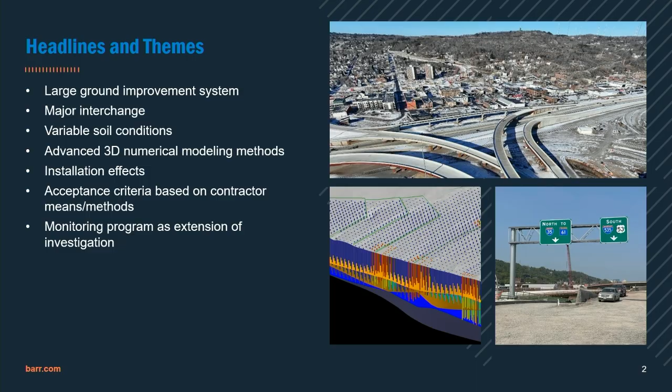Some headlines and themes we're going to talk about: poor soil conditions, the analysis and modeling that went into that analysis on which a design was based, then the construction of that design using construction methods that weren't quite as well understood going into construction, and then a robust monitoring program throughout all of it to confirm that it was performing as expected.

So I'll go through the standard outline. You're going to get some background. I'm going to talk about some soil conditions. I'll hit the analysis and the design, the construction, and the performance. And I'll tell you what these little things are in this picture.

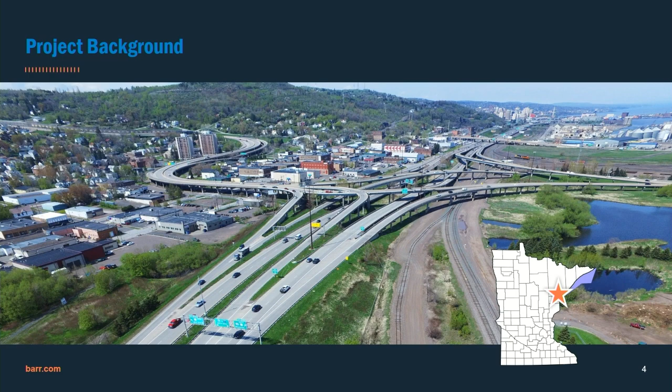So why? Well, everything you saw from that yellow sign to that overpass was on bridges. Some of those are low-profile bridges, like you see here, with a lot of pile bents supporting them with exposed pile. It's a costly maintenance and inspection effort by the DOT, and they wanted to get away from that.

Moreover, all the freight traffic that comes into the port, offloaded from ships and wanting to get onto trucks, can't use that interchange. The geometry is such that the really big components coming through the port have to make their way through city streets. So another ambition of this project was to redo the geometry of the interchange so it was more friendly to heavy industrial traffic.

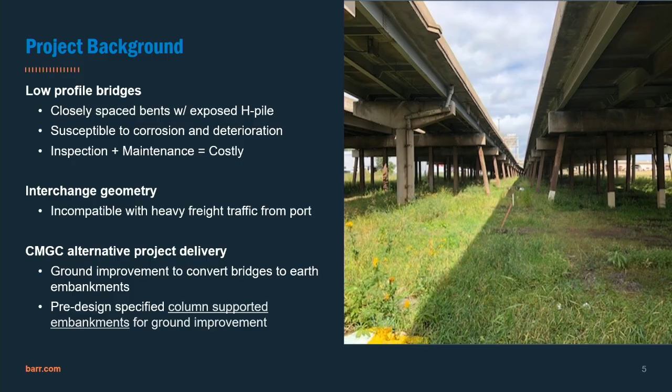Something I'll say here, but probably won't mention again, is this was an alternative project delivery. So this wasn't your standard design-bid-build project delivery; this is what's known as construction manager, general contractor. My colleague Mike Hagerty is going to talk more about this later—he's the person who swapped slots with me to accommodate some personal conflicts, so thank you, Mike. But this project was also, like his project, an alternative project delivery.

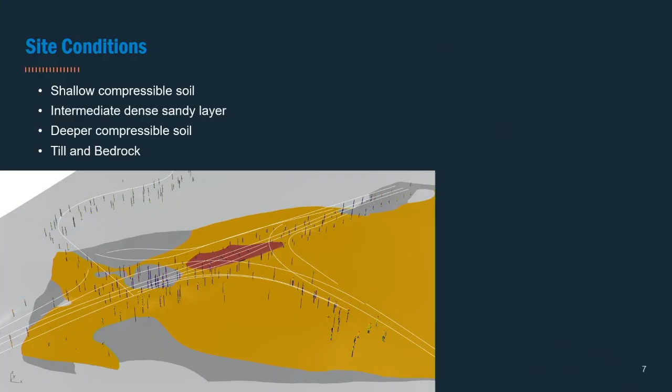All right, some site conditions. Generally speaking—and I use that term loosely, because soil conditions changed every time you stepped a foot across the site—generally speaking, we had a zone of upper soft clay: lacustrine sediments, soft alluvials, some organics, even some naughty industrial fill that might be in the ground.

And then we had a zone of lower clay, also alluvial and lacustrine, a little bit stronger, but not all that much. That's fine and good, but what really made this site problematic was the layer of dense sand in between them that could come and go. It was anywhere from 0 to 40 feet thick, and it was very dense.

If we look at something that's going to support high embankments, some retaining walls, some of those might be on piles or other column elements. It's going to be hard to get that stuff through dense sand, but sometimes if it's only 5 feet thick, we'll plow right through it and not even know it. That was a challenge on this project.

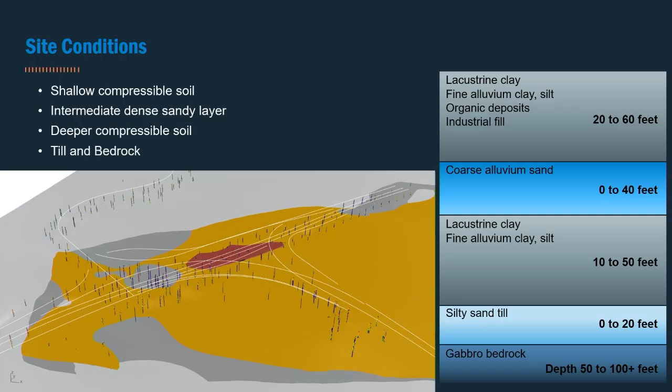I got some boring logs here because I couldn't help myself. You can't read that, but it's soft, weight of hammer, more compressible, more weight of hammer. This is a cone sounding, which really illustrates how that dense sand goes from really soft weight of hammer material, and then the tip resistance in the middle of that plot shoots way up - it's really, really dense sand. But underneath it is more compressible material.

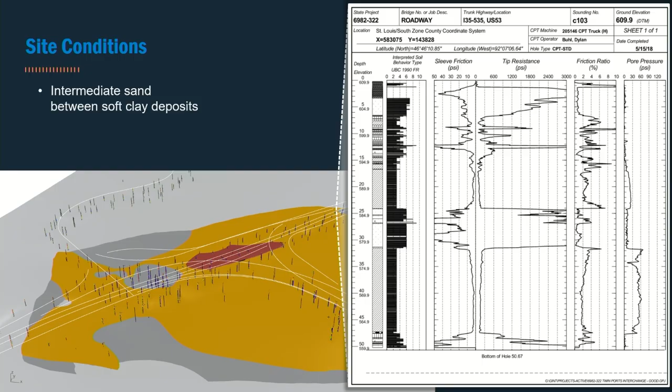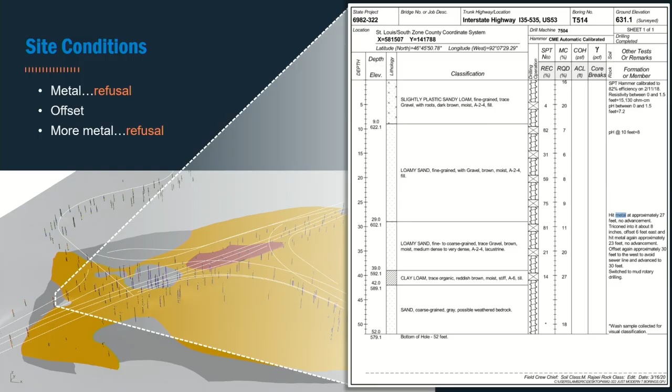We even found some metal debris in peat, of all things, in spots where we hit it. So, okay, that's bad. Moved over, drilled again, hit more metal debris at the same depth, moved over, hit it again. The running joke was there's a Volkswagen on this job somewhere - who's going to be the one to find it?

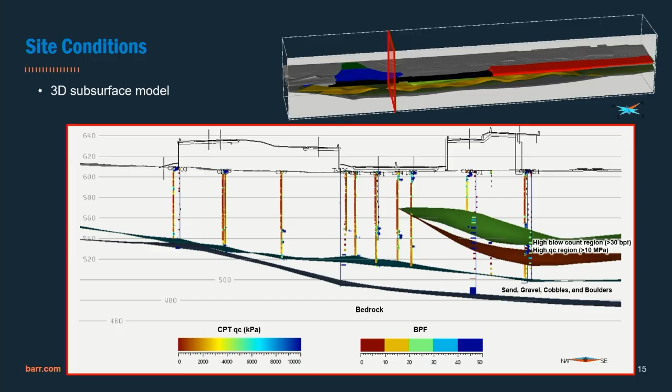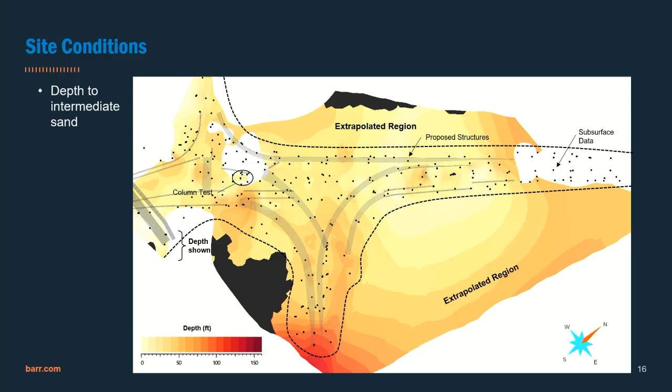In this cross-section, that green and brown blob to the right is our kind of floating dense sand layer. You can see it exists to some thickness on one side of the alignment, but on the left side, it's gone. From that, we can come up with some nice plots that show us depth to the top of the sand and contours of thickness, perhaps. So it was very useful to try to get a handle on what are the bad soil conditions here.

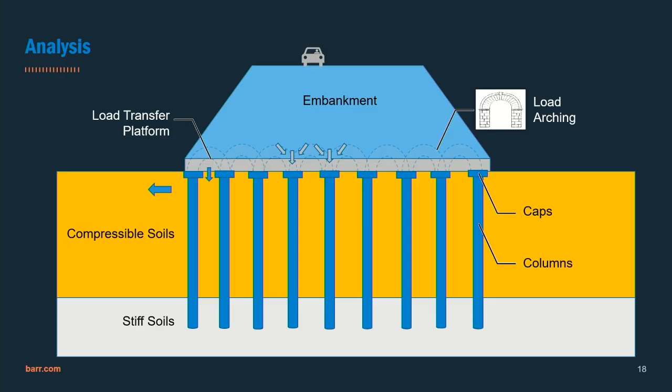So typically in these systems, what's built is an aggregate platform of well-graded, compacted aggregate interspersed with some geosynthetics to get it stiff, but it's not all that stiff - there is some give to it. The mechanisms we look at when we design these things are three mechanisms.

We're looking at settlement - that's the overall thing we're trying to treat and address. We don't want the roadway or other structures to settle, but you do get some settlement in between the columns. So you want to keep track of that and see what's the magnitude, how big a deal is that. Then we look at load transfer into the columns - is the load arching between columns the way we expect it to?

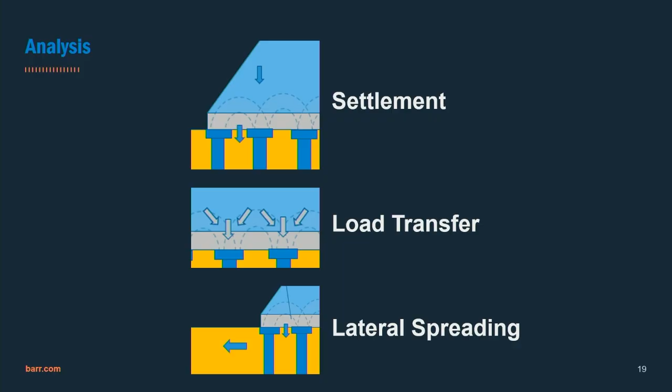Then sometimes, if the settlement in between columns is enough, and the soils are soft enough, and along the edges of these systems if the grade is steep enough - say you have a wall - you can get a phenomenon we call lateral spreading, where even that little bit of settlement in between columns is enough to shove the soil out of the way. To the outside of the system, there's nothing there to confine it, so it has a tendency to flow out and spread off to the side. When we're building rigid structures like concrete retaining walls, or maybe we have some drainage infrastructure there, a little bit of movement could be a big deal.

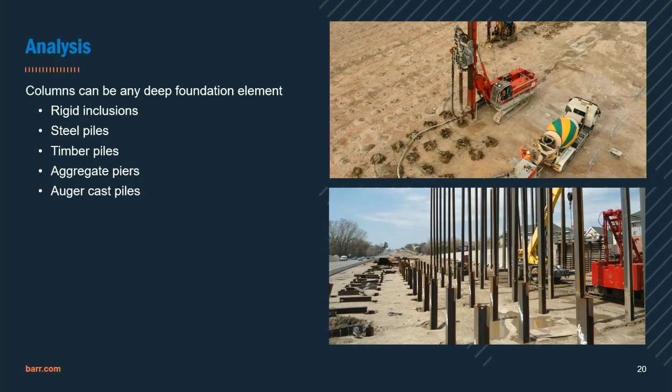Some slides on the columns themselves. What do the columns mean? Well, they can be a lot of different things. In this case, rigid inclusions is the industry term for unreinforced concrete shafts that can be installed really quickly in soft soils, and we used a lot of those on this project. You could also use steel piles, and we did in fact use some H piles in some select areas. But you could use timber piles, aggregate columns, whatever deep foundation element you think suits your job, you can do that.

The load transfer platform is a thickness of compacted aggregate with some geosynthetics layered in to help get it stiff. That's typical. You could do concrete, and in fact we did have a small part of this job where we had to use a concrete load transfer platform, but it's very commonly compacted aggregate.

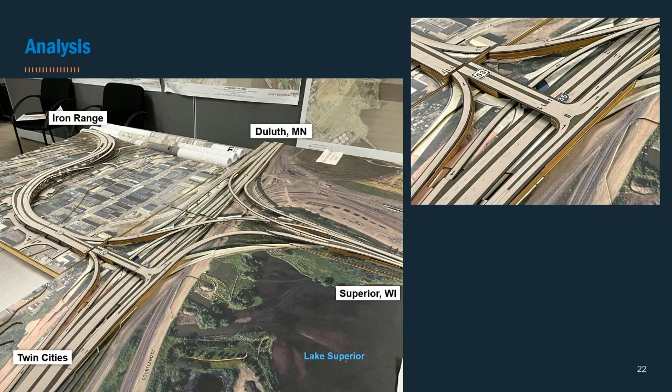Okay, this is a mock-up of the new interchange. It kind of looks like the old one just because there's a lot of wavy roads going everywhere. But now the distinction is, instead of everything supported on pile bents and typical structural foundations, these are supported on embankments, faced by retaining walls. We've got MSE walls, concrete walls on piles, and concrete walls on spread footings. And so when that happens, you've got rigid elements interacting with soft elements.

In the engineering analysis, when you have high modulus rigid walls and piles interacting with low modulus soft soils, our conventional analog ways of evaluating that can be complicated, tedious, and overly conservative, sometimes really conservative. So it's really been in the last several years where numerical modeling software has allowed engineers to look at the discrete interactions. In a finite difference model or finite element model, we can look at all the different deformational and elastic interactions between all the materials, iterate that, and come up with a result that shows just what the displacements are. To do that analog with just equations is very challenging, if not impossible. So that's why we use what we'll show you next: a three-dimensional numerical analysis software.

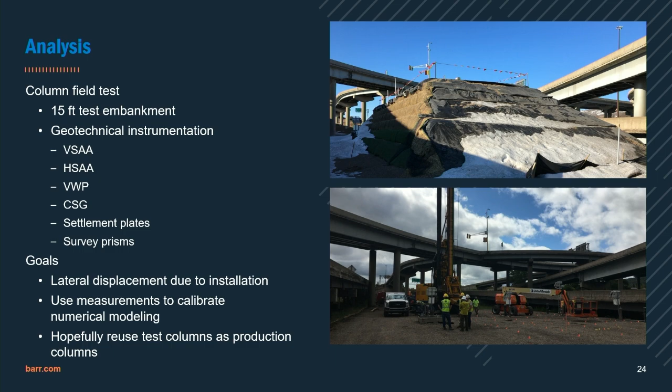And then C, get more of a firsthand look at how, as these columns go in, they affect nearby infrastructure. Like in this lower photo, there are bridges to the side carrying traffic. Are those at risk in any way?

And I want to point out that my colleague at the DOT, Rich Lamb, wrote a paper on this and presented it at a conference a few years ago. So he's got all sorts of plots and results on that.

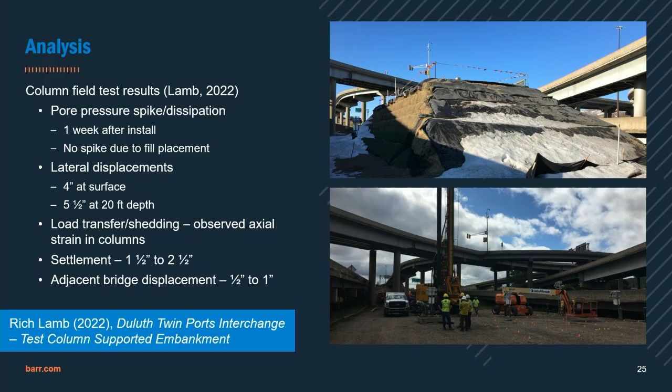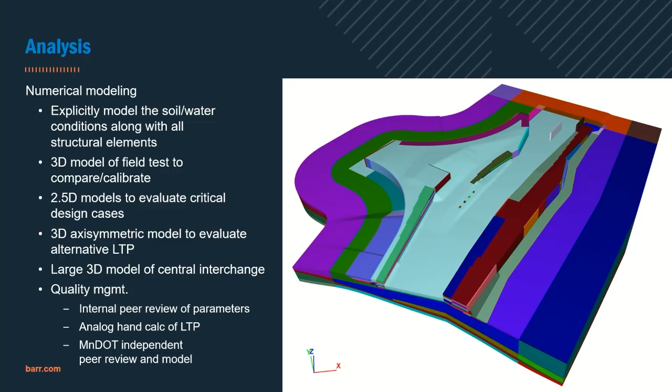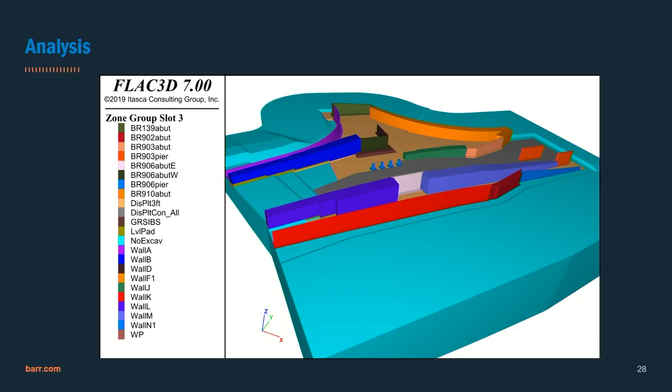I'm not going to go through all those bullet points, but suffice to say, we built a large 3D numerical model at the center of the interchange that encompassed all of the different bridge abutments, retaining walls, reinforced zones for MSE walls, and the different material sections for the load transfer platform, working platforms, and general roadway fill. That's all incorporated into this model. It takes a long time to get the geometry created and set, but once you do, you can start iterating on different parameters, tweak some of the interactions between different elements, and do a nice sensitivity analysis to see what are the critical areas of the project.

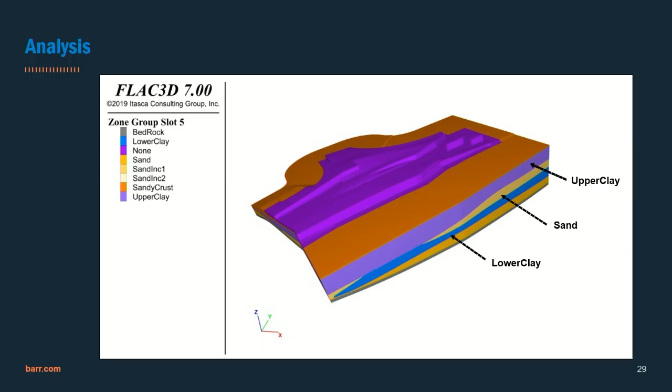And then also what's nice is we take that large 3D soil model we created from all of our soil investigation, and that gets directly imported into here and is spatially correct from one end of the model to the other.

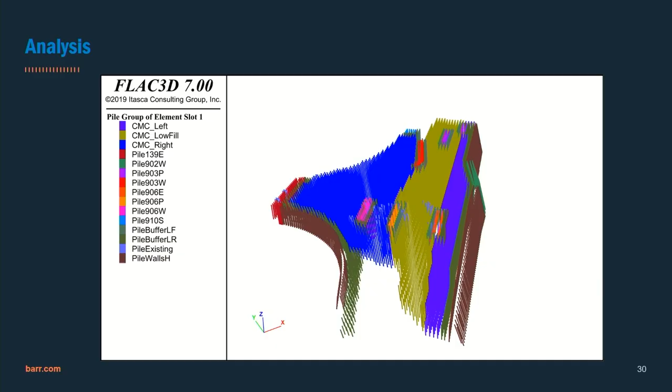And then all of our columns go in there as discrete elements, so we don't make any generalization on any sets of columns or anything. We can isolate on any given column and see: is it performing the way it's supposed to? Is it in failure? Is it bending? The model allows us to do that.

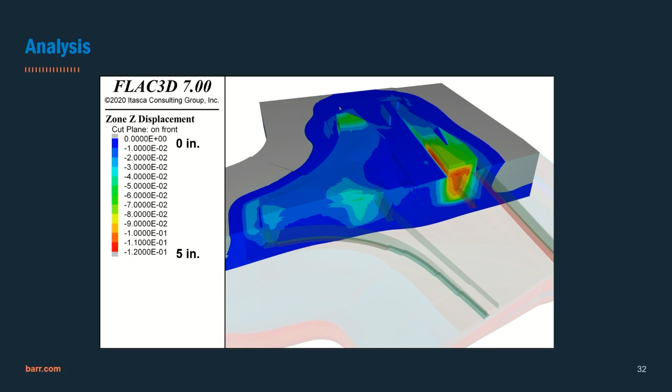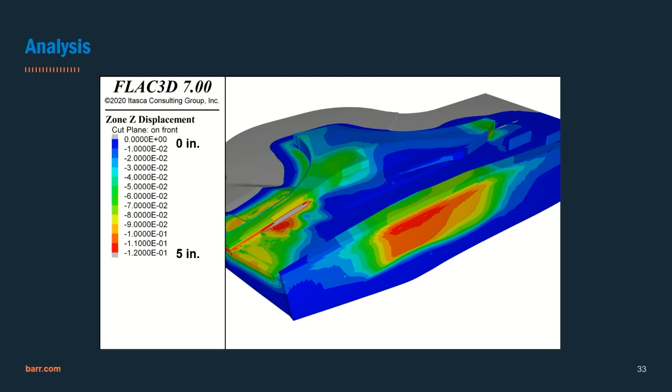If we look at a cross-section 90 degrees to that, we see that big red zone again. But again, the tops of the embankments shown as green are showing settlement at acceptable levels. That red blob to the left side, that's a boundary effect. Yeah, that looks bad, doesn't it, Brent? But it represents an area where we have untreated ground. We couldn't quite scrub that from the model, but that was not an area that needed ground improvement treatment.

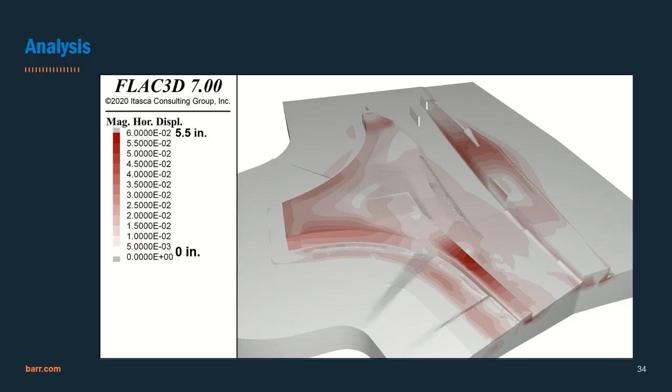Lateral deformations: we can look at the effect of lateral spreading. How much do the soil, the walls, especially at the toes of walls, spread outward and kick outward? We can analyze that, and this is showing that we saw lateral deformations of not quite 6 inches, more in the 5 to 5.5 inch range, as predicted by the model. In reality, we saw much less than that. But it was still enough that in order to properly mitigate it, we put in a system of large diameter steel rebars in the embankment. That was another feature of the ground improvement system.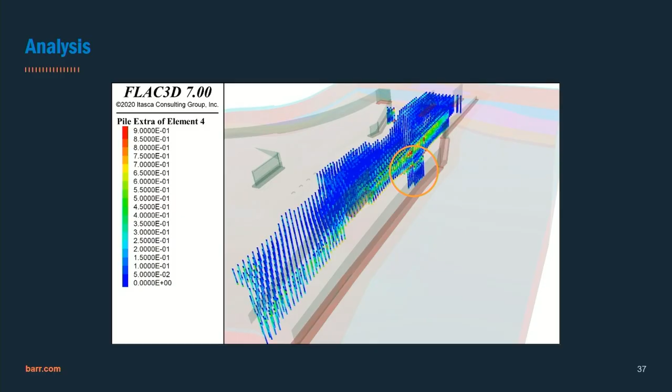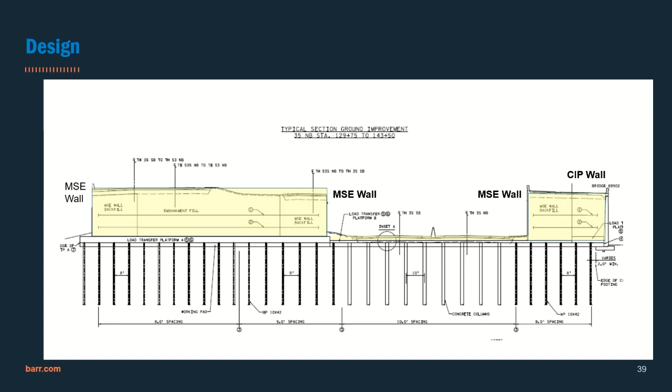All right, so what does that look like as a design? This is a typical section. We've got high fills on the left and right, and then a low fill area in the middle, which would settle if not treated, but it's lower. We've got columns from one side to the other at different spacings, from 8 to 10 feet apart. Load transfer platforms are 3 feet thick beneath the higher fills, only 2 feet thick beneath the lower fills. And then our layers of steel rebar in the embankment. This particular section had number 10 and number 14 rebar.

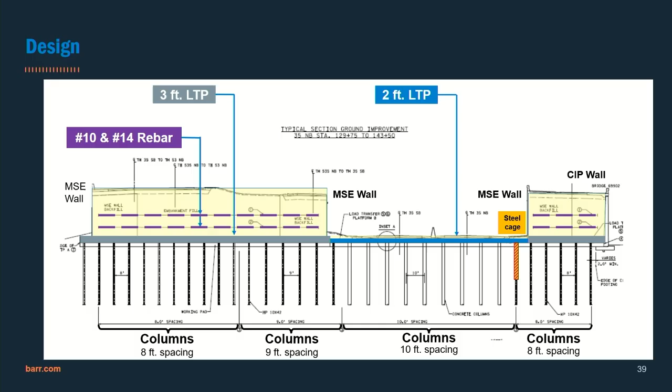And one critical case we found through the analysis was in parts where columns were out in front of walls retaining high fills, those were at critical risk of failure and bending. So we had to put steel rebar cages in those columns to mitigate against bending failure.

So there's a picture of the columns and a group of them that were exhumed. Concrete strength of the columns was specified as 5,000 PSI. Their minimum diameter is 16 inches, and they're installed as what's called full displacement columns. I've got a slide that will better illustrate what exactly that means.

For the high fill areas, termination criteria were to take those columns down to a hard bearing stratum, wherever the soil model says a hard bearing stratum was. For the low fill area, those columns were only up to 60 feet in length, and those were supporting the low fills in just frictional side resistance within the soft material.

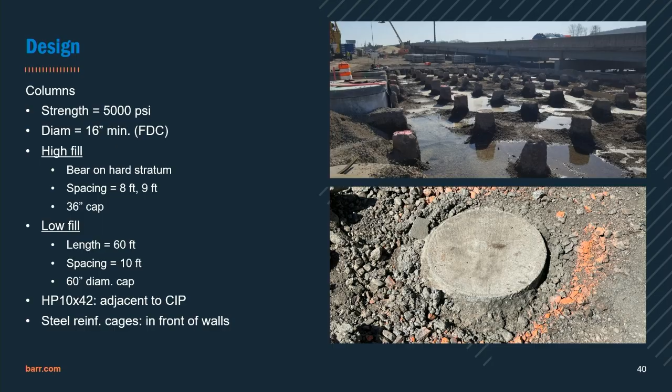At the tops of the columns, as a way to optimize spacing, we had caps. Each column had a cap. For the high fill areas, we had 3-foot diameter caps. For the low fill area, it may sound counterintuitive, but we needed bigger caps because of the thin height of the load transfer platform. The math works out that if you want columns farther apart, you need to mitigate that by having your edge-to-edge cap distance fit and match within just a 2-foot thick layer of LTP.

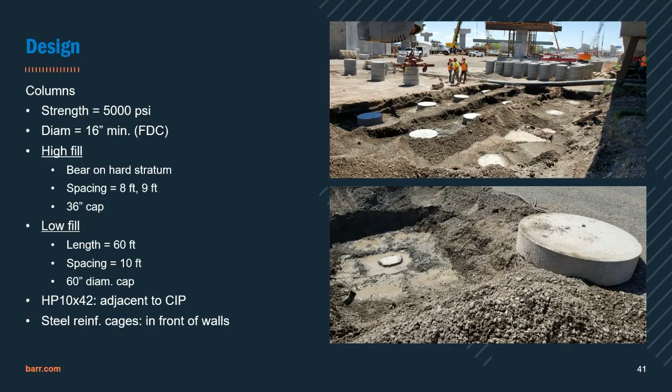For the load transfer platform, on top is the conventional compacted aggregate load transfer platform with geogrid. On the lower left, there is the special concrete load transfer platform that we poured, which was to span a new 72-inch storm sewer being placed inside a 96-inch casing. It was just too far of a span for the conventional load transfer platform to distribute the stresses, so we put in a 2-foot thick fiber reinforced concrete platform.

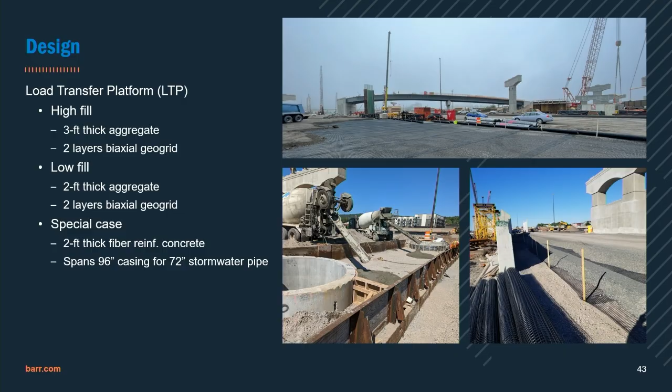This is a picture of the steel rebar. On the top picture, it's intermixed with the steel reinforcement of the MSE walls. But those serve to help passively - as the embankment may have this tendency to spread out due to that lateral spreading phenomenon, it will engage those plates, and it's that passive engagement that prevents the embankment from spreading more.

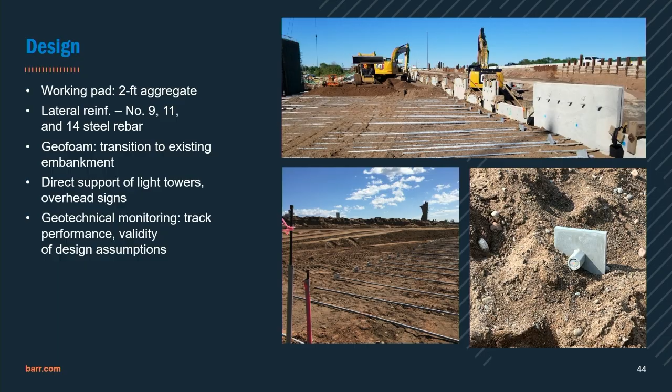We also had one area, harder to see, where the limits of our improvement came up against an existing embankment, and in order to mitigate settlements we thought would happen, we would have had to excavate a substantial part of that embankment. So instead, we had a lightweight fill area to mitigate those settlements - some areas where geofoam was used as a transition from our column-supported part to a non-treated part.

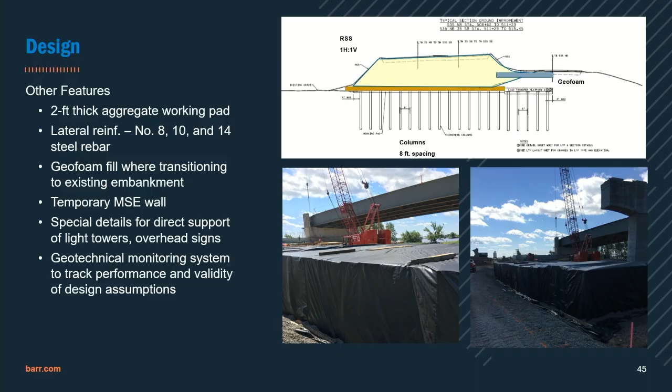This is a picture of a temporary wrap face wall that had to be explicitly addressed, making sure we had columns supporting that during the first year of construction. It was just another one of those specific challenges that can happen on any project, to make sure we addressed support of this wall during construction.

Overhead signs and some of the tall light towers were also located throughout the footprint of this ground improvement. Sometimes those were supported just as spread footings within the fill over top of our improvement system. Other times the foundations were low enough that we could directly and structurally connect the columns right into those footings.

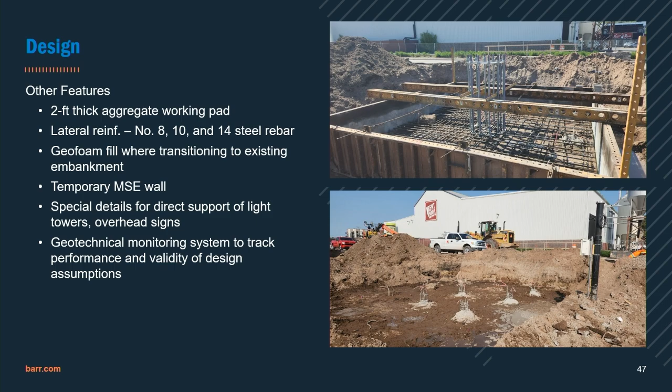So the columns themselves - those were rigid inclusions is the conventional industry term now. On this project, we just call them columns.

That is showing a rig that augers down using that tool. What happens is the flights on the edge of that tool dig into the ground, but the tooling diameter bulges out partway up from that, and that serves to push the soil to the side. So it's displacing the soil to the side, keeping it in the ground. This was selected because it was low spoil risk at the top - we didn't want spoil from the ground coming up to the surface for environmental reasons.

Once it goes down there and pushes the soil to the side, there are ports at the end of the tooling which open up, and as the tooling is withdrawn, the whole column is tremie grouted from the bottom up. The whole thing can take 5-6 minutes. It's very fast. Some of the longer columns may be closer to 10 minutes, because we did have some 100-foot columns, but it goes very fast. You can do over 100 columns in a day.

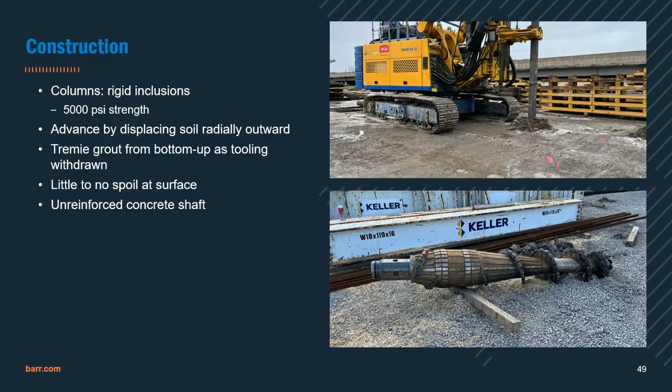We did load tests on those columns just to confirm the suitability of the bearing layer that they were bearing on, but then also as a way to check that the contractor's means and methods were consistent, that they supported the analysis that went into putting that column on that bearing layer.

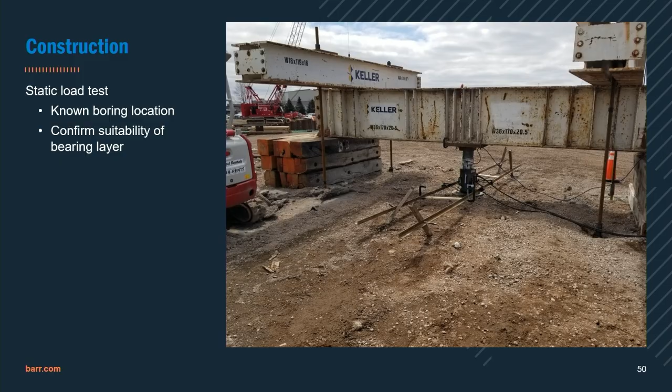But the load tests themselves are not a great way to establish termination criteria, and that was a big challenge on this project. Contrast with pile driving, you can just count blows and get a sense of how well that pile is engaging the soil at depth. Hey, are we getting the capacity we want?

With columns, as of the time this was designed, there was no standardized way to specify what the termination criteria was. Different contractors have different ways they collect data as they put a column in the ground. Some common things they track are torque, crowd pressure, grout volume, the rate of advance and withdrawal. But depending on the equipment, those can have different degrees of meaning.

Some contractors will put a lot of stock in torque. When they see a spike in torque, hey, we know we're in something good. Other contractors, not so much. So that was a challenge on this project.

The initial spec for the project gave a torque rate. It's kind of made up, but we needed something to give contractors to bid on. But then we explicitly said, hey, we know you're not going to like that rate, so we're going to do a series of demonstration columns at the beginning, and we will collectively come to an agreement on what constitutes termination criteria. And in this case, for this contractor, they had a

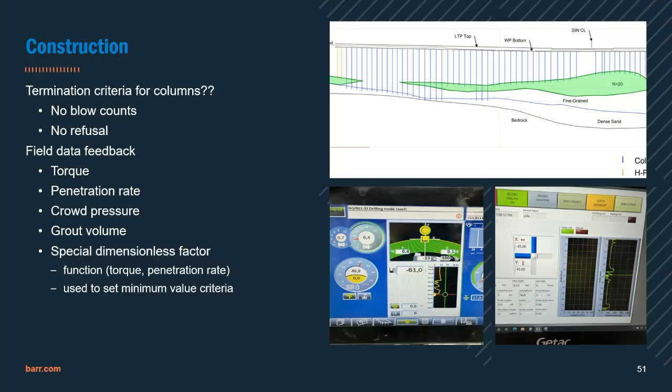dimensionless factor that their system spit out that we then calibrated to the needs of our design, and it worked out very well. There was a lot of angst in the beginning, but once we got that established, it was invaluable to set the termination criteria and then review logs for what amounted to thousands and thousands of columns.

Thousands and thousands of columns. So we had 6,375 of those rigid inclusion concrete columns. On top of that, we had over 1,700 H-piles. The reasons we had H-piles, I don't have time to go into. In hindsight, we probably didn't need to use them, but it was a bit of a compromise with the DOT's bridge office. But those are counted as part of the system. So all told, we had over 8,100 of these elements going in the ground, encompassing a plan area of 13.8 acres.

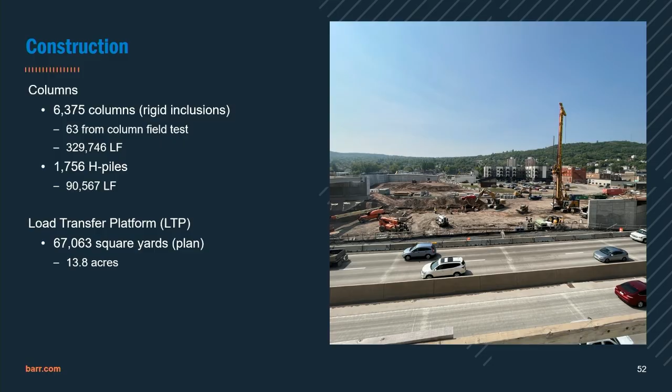Okay, that's great. Did it work? Let's find out.

So again, the things we look at when we design these systems are settlement, load transfer, and lateral spreading. Those are the engineering things. But installation effects was this construction-based phenomena that we had to be sure we kept track of. Was that going to be a big deal or not? Spoiler, it kind of was.

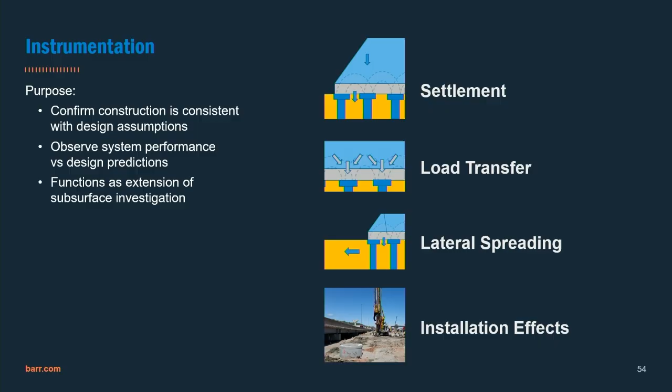For instrumentation, to track settlement and lateral spreading, we used what we call shape arrays. I'm going to get yelled at for this by other geotechs, but they're kind of glorified inclinometers. They're automated and can collect data up and down the length of the hose. We put those in horizontally as a way to measure settlement, underneath our load transfer platform. We put those in vertically to measure lateral deformations.

In the columns themselves, we had strain gauges on steel cages as a way to measure the take-up of axial strain and stress in columns, to make sure the columns are accepting the load. We also had strain gauges on the lateral rebar in the embankment, and that was a way to look at lateral spreading—are we getting take-up in those bars of axial strain, showing they're resisting some tendency of the embankment to move to the sides?

Qualitatively, we also put in vibrating wire piezometers. They're great for everything, we put in a lot of them. In this case, it helped us look at pore pressure increases in the soil, which might be an indication that the soil is going to consolidate, but it also shows how much those pressures spike due to installation when we put the columns in the ground.

We also put earth pressure cells at different levels of the load transfer platform. I don't put much stock in the quantitative readings of earth pressure cells, but they're great for looking at relative increases or decreases in earth pressure. So that was a qualitative redundant check on load transfer.

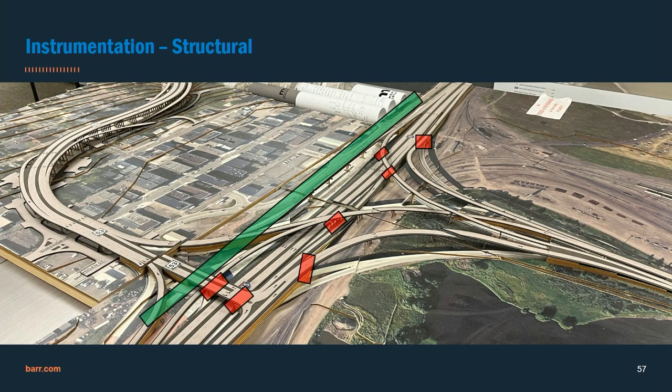The red squares and polygons represent bridge foundations on piles that were installed prior to the ground improvement going in. That green rectangle represents live traffic on an adjacent bridge, old bridge. So this is all in close quarters. These columns are going in just feet away from these features.

So we had tilt meters in those locations to look at vertical rotation. We had an automated total station with prisms that shot at intervals around the clock to look at different ways the structures might behave in three-dimensional space. They moving away, closer, left, right.

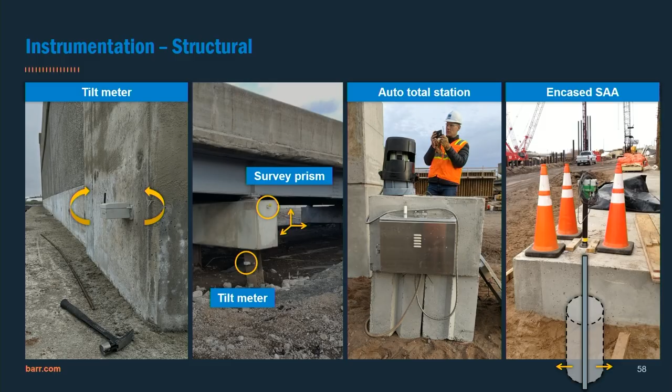And then on the far right, we did something that I think at the time was kind of novel. Maybe it's been done before. We put one of our shape arrays, again that's this glorified inclinometer, inside the pipe pile that supports one of the bridge abutments. The thought there is if the piles supporting those bridge abutments are going to feel that soil deformation against them and they're going to want to deform, hopefully we see that in this pile, and we'll see just how much deformation does occur.

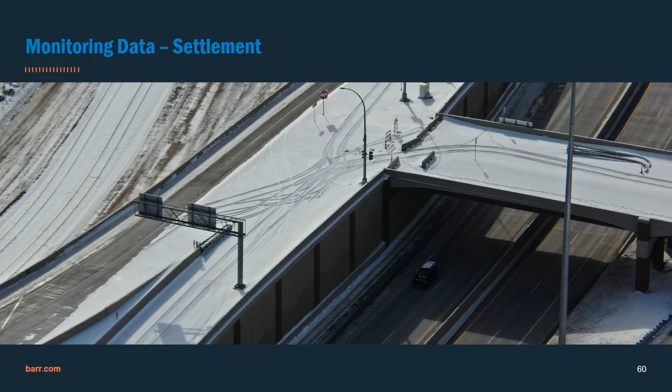All right, for settlement, I'm going to zoom in on this wall. It looks like a lot of the other walls, but this is actually the highest fill on the site. This is the same spot of the 5 inches of settlement slide I showed you earlier. This is just a picture of our shape array going in the ground.

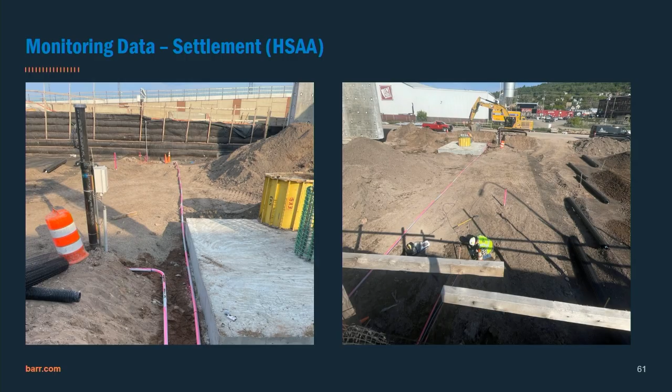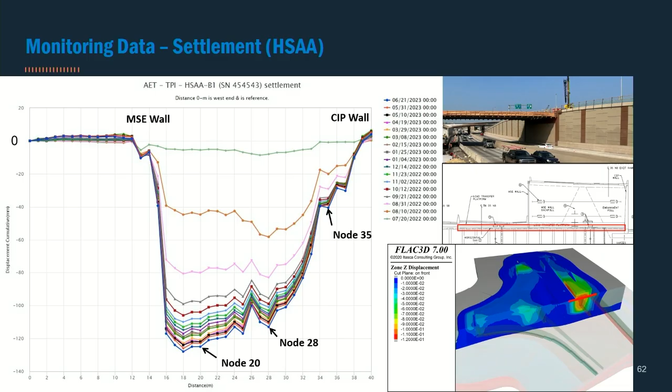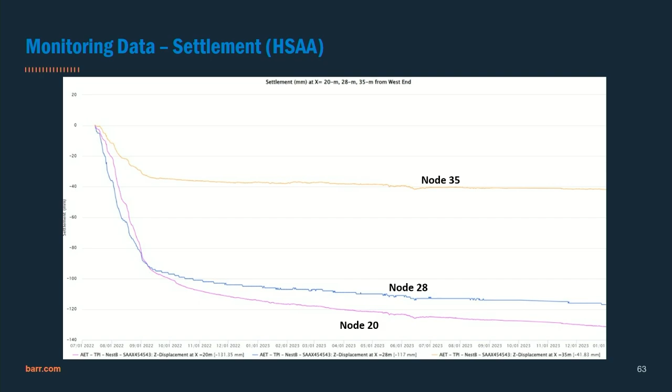The 3 nodes, the next slide is going to show the displacement versus time at each of those 3 nodes. So you can see we get most of our initial settlement right away at the beginning on the left during fill placement, and then as time goes on to the right, that displacement levels off. We enter more the creep domain of the soil settlement behavior, and that levels off. We have more data even beyond this slide, and it levels off even more.

The settlement plates, man, we tried. I really wanted to have ways to show how the settlement below and above the LTP was different. But we had challenges with getting baseline readings, and getting readings when rod extensions were added, so regrettably, I don't have great data on the settlement curves.

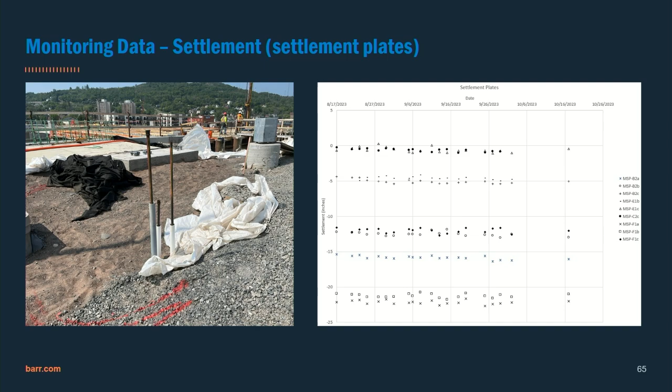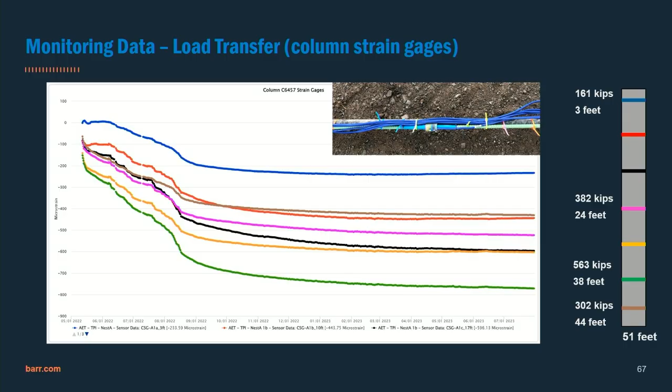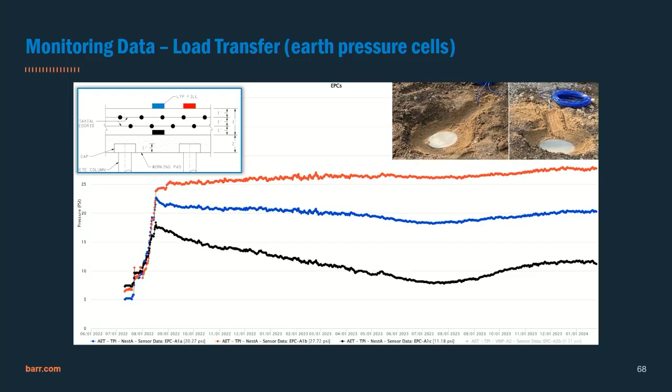Well then why, Brent, is it increasing at the far right? Well, these are not systems where they accept the load and then it doesn't change. It will change. As one column accepts load over here, it might lessen over here, but then it has side effects to the other ones. There's thousands of columns, and there'll be some feeling out of it as everything settles into place. So it's not unexpected that we see some variability on that, even after it had decreased.

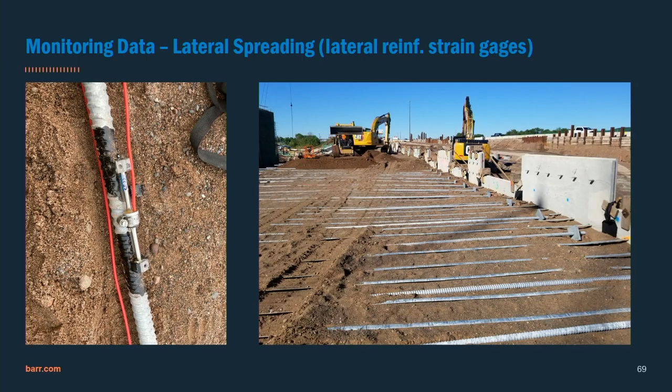For those lateral bars, there was some feedback from the team asking, do we really need those, Brent? This is showing that yeah, those did take up a heck of a lot of strain to help prevent the embankment from spreading outwards. Would it have spread outwards a lot? Well, who knows, but it would have looked bad. The walls might crack, MSE panels would be out of place, maybe some storm sewers get jostled around and don't work as well. So this was necessary.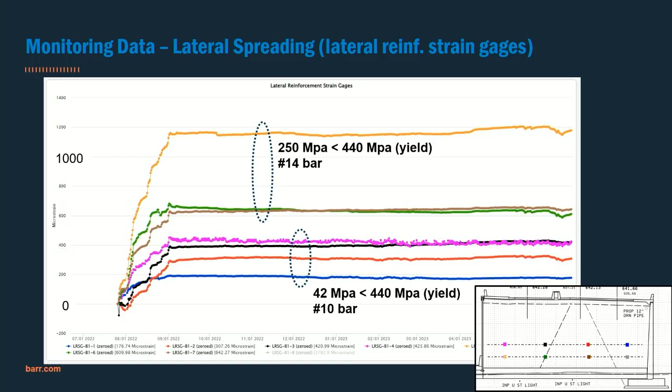The opposite happened. Why? Well, that's because the contractor decided to build up the MSE side of everything first and not backfill behind the retaining wall. It's fine, it worked, but that's not how I would have expected it to go.

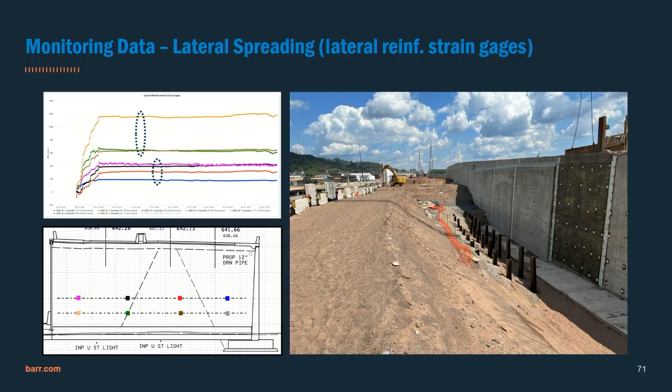Installation effects.

Just to reemphasize, that bridge on the left is carrying live traffic during the first year of construction, and we've got columns going in within 10 feet of that, with hundreds of those things along this stretch. During the test embankment, we saw the ground shift 4 inches just by putting in a small group of columns. Now we're putting in 10 times that.

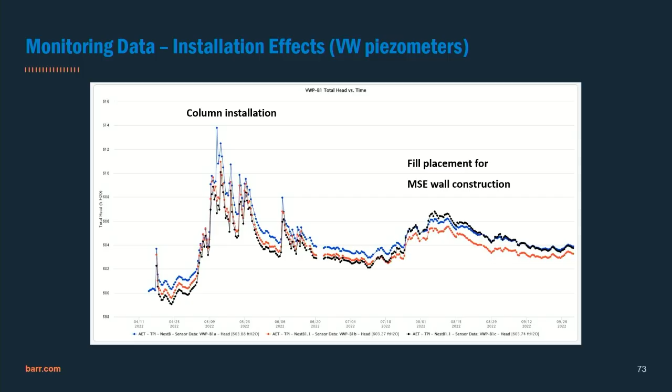So the piezometer there is showing the increase in pore pressure as felt by a piezometer. We do see a sharp spike in pore pressure over 10 feet of head just due to putting columns into the ground. Then after the columns were in, we see another slight bump just from fill placement.

But what really excited us was the encased SAA that we put in the piles supporting the bridge footing. On the right, you see a corner of a bridge footing. In between those cones is the stick-up of one of our sensors coming up out of the pile.

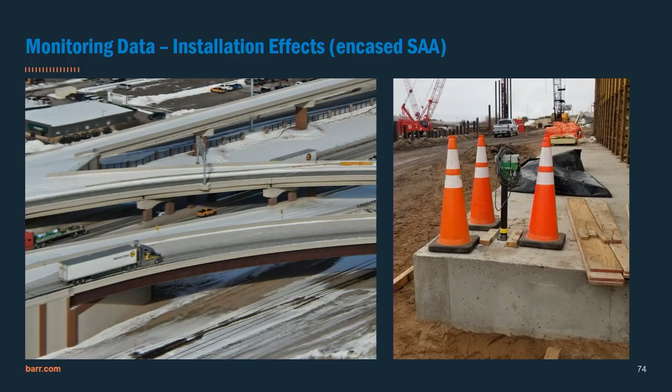This bridge abutment was the highest abutment on the job, and it was one that's going to receive those sweeping curved beams for some of the large passes. An inch out of tolerance at the top of that abutment was a big deal to some of the bridge designers.

I don't know the whole story, but I was told there were things that had to be done to make sure the top of the abutment was corrected in order to receive the beams. In the end, they were able to do it, but it wasn't like, oh, no big deal - there were adjustments that needed to be made. When I give this talk and illustrate this slide, it's the bridge structural engineers that get really wide eyes, like whoa, never would have thought that happened.

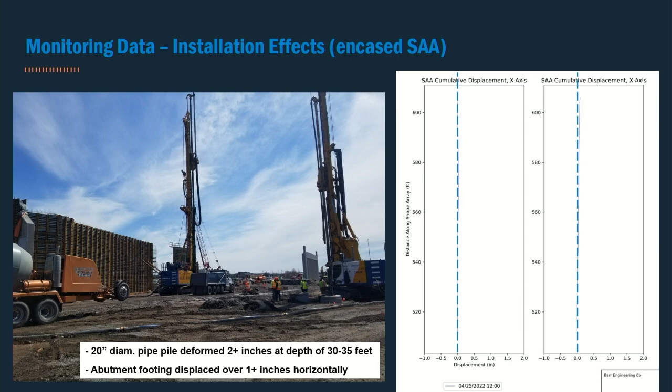Okay, I got some more comments. How am I doing on time? Good? All right.

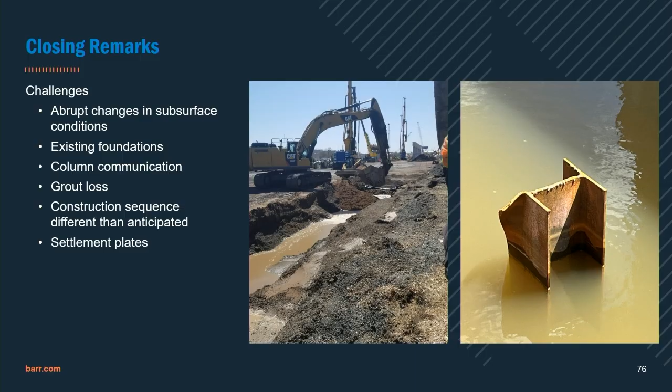Just some of the weird quirks that came up during the job. I touched on this already, but abrupt changes in subsurface conditions - we have our 3D soil model, and it's great and all, but on the job we could have a column go down 40 feet, struggle to get another foot into whatever material it's in, presumably dense sand. Okay, that's great. Then we go 8 feet over to the next column, and it goes down 90 feet. That happened often. So there were times we had to go back to the model, rerun an analysis assuming different column lengths just to make sure the design was still adequate for those changing conditions.

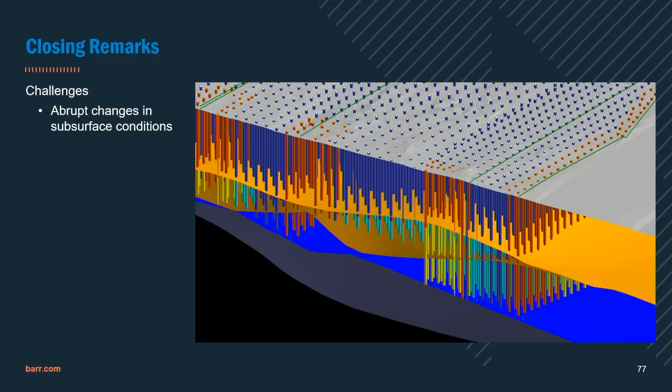Existing foundations were another challenge. That previous interchange had pile bents everywhere - those piles got cut off in the ground. Some of the substructures were actual column foundations with a footing and a pile cap. Sometimes those pile caps were removed, other times they were not. I was told, Brent, for the ones that are not removed, you're just going to have to deal with it and put your ground improvement around it.

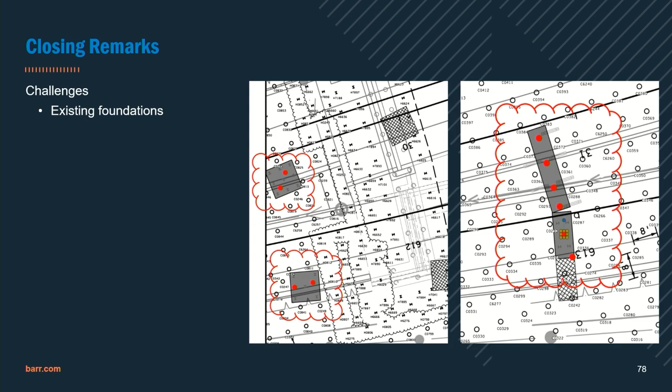And that's great, but then later I was told, no, those actually did come out. So keeping track of that during construction meant making sure we were putting extra columns in the ground if needed. There was also a little bit of anxiety around relying on a foundation pile cap that's been there 60-some years as an integral part of our system. It turned out to work, but at the beginning there was some trust that needed to be built there.

Challenges with grouting those rigid inclusions. That's one of the challenges contractors will tell you: you put all these columns into the ground and it's all liquid, wet grout each time you do it. There's risk of communication between adjacent columns. If the soils are really soft or you've got water-bearing lenses in between them, sometimes that grout will shoot through those lenses and you'll see it come up in the column next to you. So we don't like that.

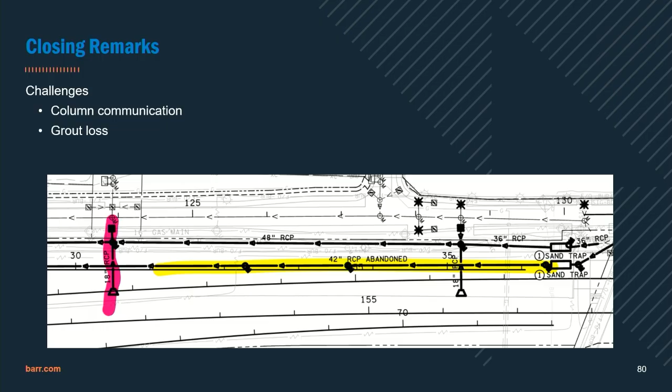I looked at this and thought, man, if I didn't know any better, I'd say there's a pipe in the ground. No, Brent, there's no pipe. There's no pipe—until somebody says, Brent, I think there might be a pipe in the ground. The yellow is a 42-inch reinforced concrete pipe that I was told would be taken out. That's why we have columns through there. Well, when we plot where that's supposed to be, it's right in line with those yellow columns.

So this is a quality control measure for construction. They got paid to take out the pipe, but they didn't take out the pipe. I don't know what happened to the contractor after that, but hopefully there was some payment adjustment there.

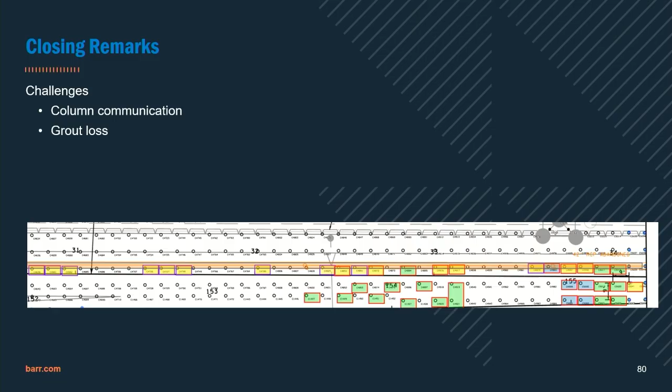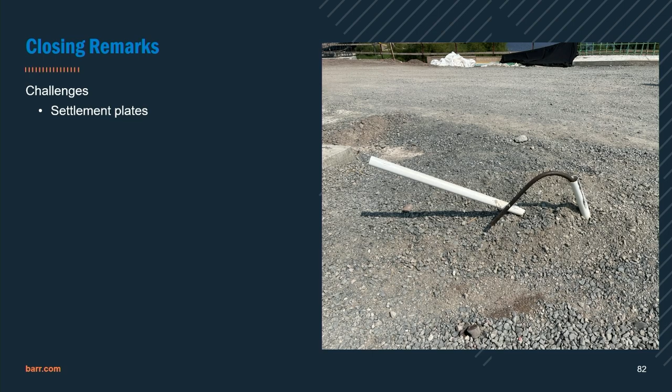All right, I'll blow through these. Settlement plates—oh, these poor settlement plates. I like settlement plates a lot; they're really cheap, and when done right, they work. But if you don't do them right, you're setting yourself up for a lot of headache and anxiety down the road if you're going to rely on the data collected from those settlement plates. That's just one soapbox of mine I've started to get on the last couple of years. If we're going to use them, you've got to make sure we take the diligence to do it right.

That happened to be a very angry day. That's not an accident—that's somebody mad at me, I think.

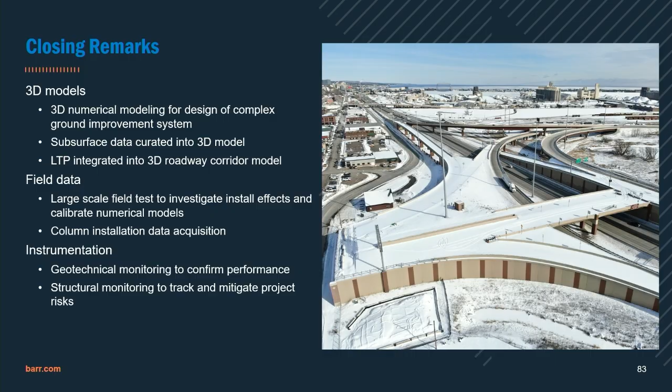All right, so just to regurgitate some other concepts I already stated—that's the interchange as it looks today in the winter. It's open to traffic, everything's open, so it worked out very well.

Acknowledging all members of the team. This was a project where one might think every consultant in Minnesota was a part of it at one point or another: the DOT, the Ames-Kraemer contracting team, the roadway design team led by SEH, the bridge design team led by Parsons, and then the ground improvement team, which was Barr, Itasca, and Stonebrooke. So, thank you.

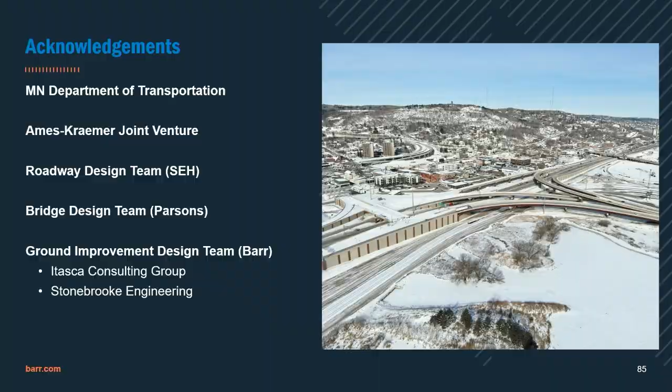You don't have to ask questions, that's okay.

What was the timeline, from the start of the investigation through this? MnDOT started a preliminary investigation, I think even before 2015. The design time, once it went into actual design, was 2018. We got brought on board when design was about 15% complete, late 2018 or 2019, can't remember. There were a couple years in the middle where things just went weird. Construction ended in '23—most of the major construction. I think there were some elements in '24 that were done, but everything was open in '23.